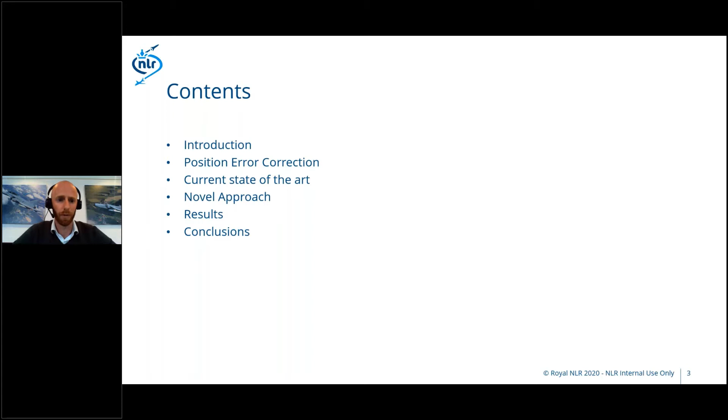Yeah, no worries, thank you. Thanks for the introduction. This is the usual slide we have at the beginning of our presentation at NLR, just for safety purposes. First, the contents of my presentation: I will start with a short introduction, then move on to explain what the position error correction is - I think that's something most of us know, but just to refresh our memories. Then the current state of the art, what approaches and methodologies are currently used to determine the position error correction. Then I will introduce the novel approach we developed, show you some results, and end with some conclusions.

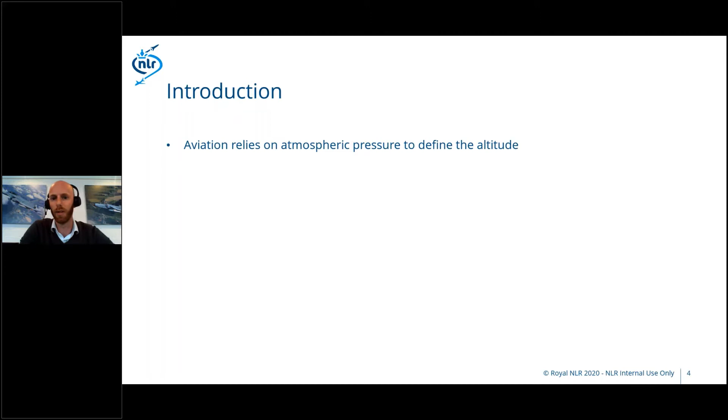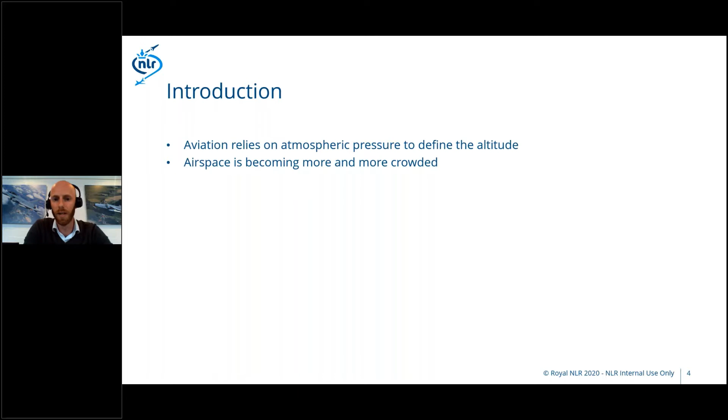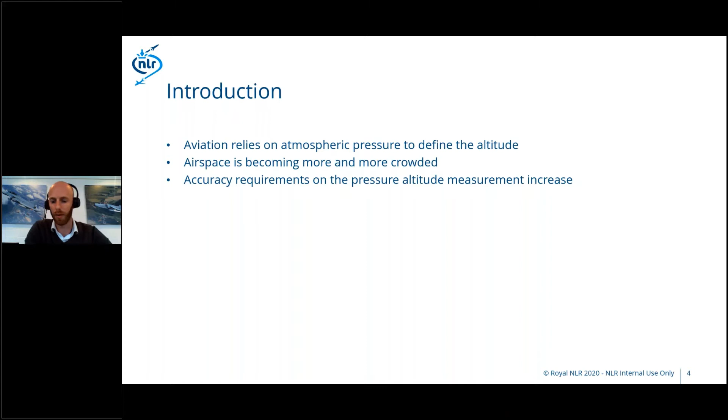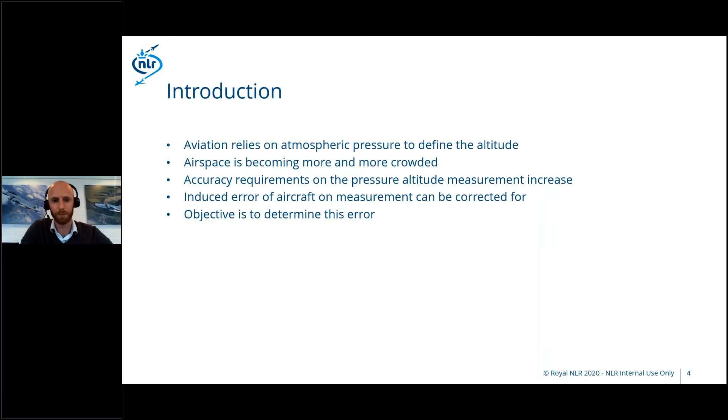So first, the introduction. Nowadays, aviation still relies on pressure measurements to define the altitude. Each aircraft measures the static pressure, and with that we define an altitude. But we also know the airspace is becoming more and more crowded - there are more people flying, more flights, and that means the accuracy requirements on pressure altitudes are increasing. Recently they have increased in a certain airspace, which we call the RVSM airspace - the requirements become more strict on that measurement. The problem is that the aircraft itself induces an error on your measurements, and that error can be corrected for. So the objective is to determine this error for your aircraft so you can correct it. For our research, we decided to use our own research aircraft, which is a Cessna Citation II.

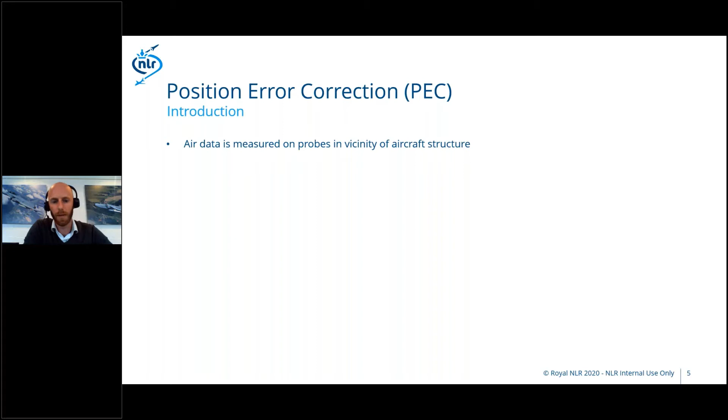So, the position error correction. We know that air data is measured on probes always on the aircraft structure or in the vicinity of the aircraft structure. We also know that at subsonic speeds, the flow field created around the aircraft extends in all directions, and for a considerable amount - usually about 1 to 2 times the span of the aircraft, so it's a large amount.

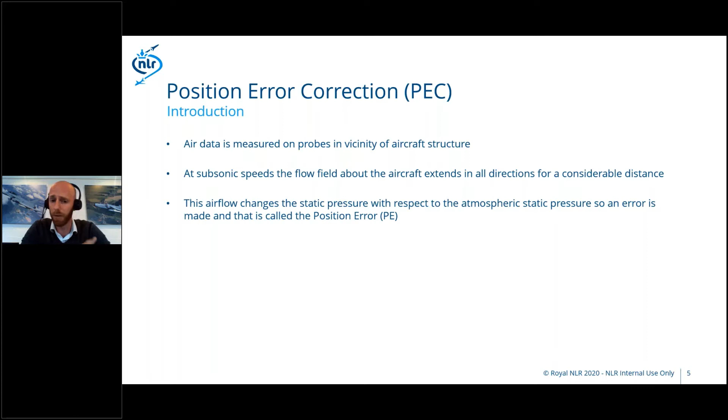This airflow, this flow field, changes the static pressure around the aircraft. That means that if you make a measurement in that flow field with your aircraft, you make an error, and we call that the position error, because it's sensitive to the position of where you put it.

We also know that the flow field is unique for each aircraft, each aircraft configuration, and also the flight condition. If you look at the top right of this slide, you see a side view of a typical aircraft, and below that the pressure distribution, the difference between atmospheric static pressure and local static pressure, which changes along a line drawn on the side of the aircraft. There are certain points, indicated here by 1 to 6, where the error is almost or exactly 0. However, if you change the aircraft configuration or flight condition, this curve will change, meaning it's impossible to find a location where the position error is 0 for all flight conditions.

Therefore, we must correct this error to make the measurement more accurate, and that's what we call the position error correction.

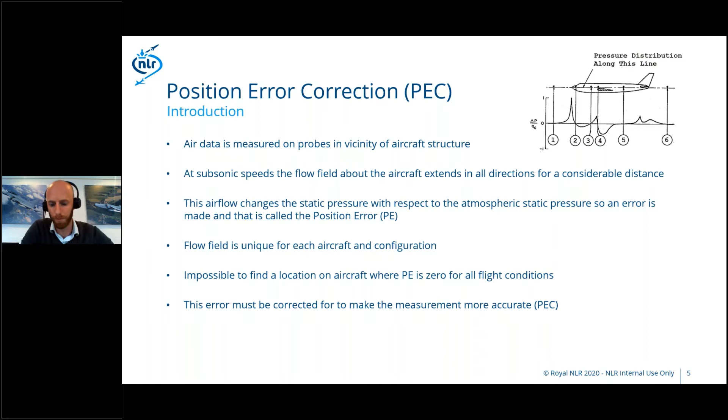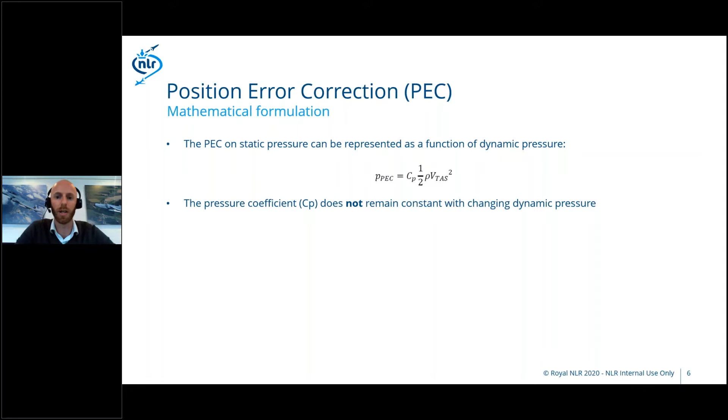So we decided to have a mathematical formulation for the position error correction in static pressure, representing it as a function of the dynamic pressure—1/2 times the density times the true airspeed squared—with a pressure coefficient in front. We also observed that this pressure coefficient does not remain constant with changing dynamic pressure: a change in altitude changes the density, or a change in speed, which also changes this pressure coefficient. That means the pressure coefficient must be represented as a separate function as well.

We decided on a polynomial expansion as a function of the inherent flight characteristics. The example here includes the Mach number, the angle of attack, the side slip angle, and a Reynolds number term. You can add as many high order terms as you like—the more high order terms, the more accurate the polynomial function becomes—but usually a few orders is sufficient for the accuracy we want.

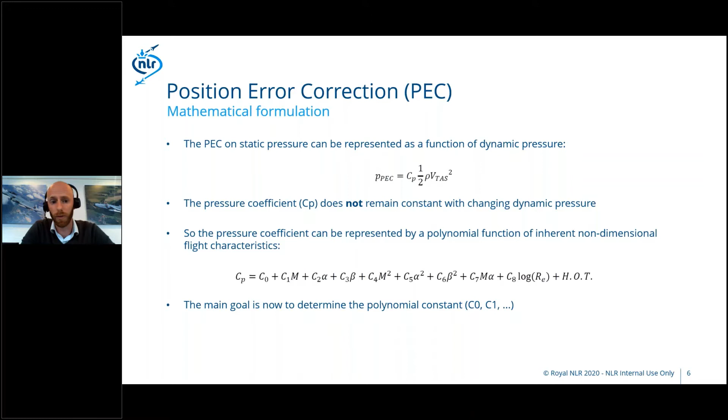Now the main goal is to determine these constants in the polynomial, C0, C1, etc., to determine the position error correction function. Currently, that is mostly done by means of flight tests. Now I will show you some currently used methods for flight testing.

One of the most popular is the tower flyby. Here, the aircraft flies by a ground station or a tower, and on the ground or tower, the static pressure of the atmosphere is measured. As long as there is not much wind, the measurement is very accurate on the ground. The aircraft then flies by the tower or ground station and measures its own static pressure, with the error included. Any small differences in altitude between the tower and the aircraft can be measured and corrected for, so the difference between both measurements becomes the PEC.

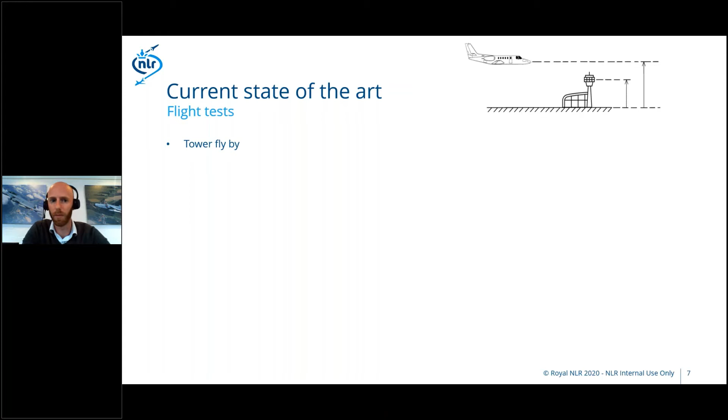Two more widely used methods are the trailing cone and the static bomb. Here you have a measurement device which you extend behind or below the aircraft far enough so the reference pressure is no longer influenced by the aircraft. The advantage is that you can reach multiple speeds and also high altitudes. The disadvantage is that you have a large structural modification to the aircraft, because you have to mount the system on it.

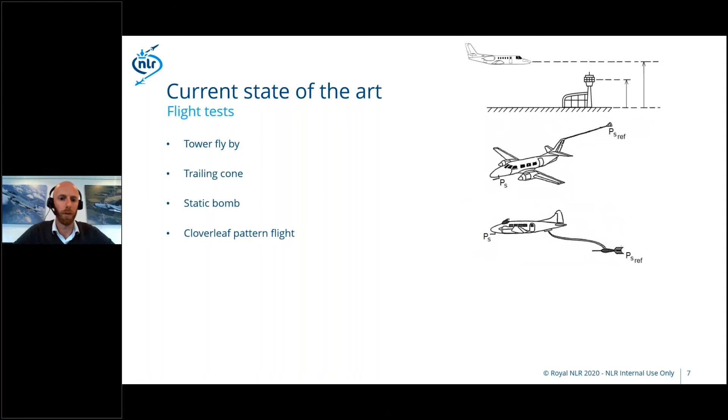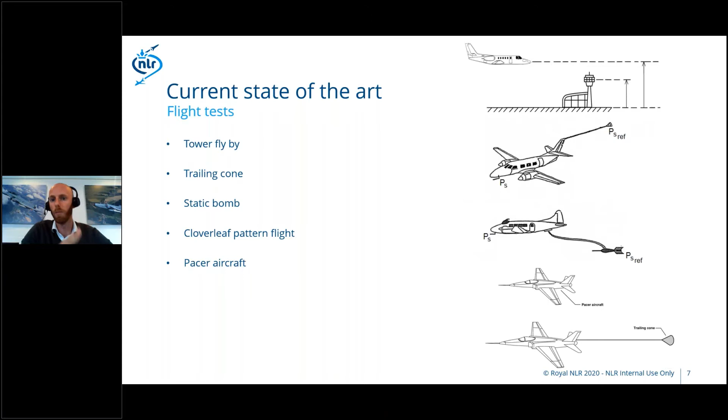There are also certain maneuvers that can be flown, like for instance a cloverleaf pattern flight. And of course you can use a pacer aircraft, one of the two aircraft already having to be calibrated or have a calibration device on it. There are of course more methods and more combined methods, but these are just a few that I wanted to present.

Our methodology consists of 3 parts. We start with calculations, so computational fluid dynamics. Of course, this is a very cheap method. It's not flight testing, but it's cheap.

We make a priori model with the computational fluid dynamics, so we make the first estimation of the polynomial that I showed earlier.

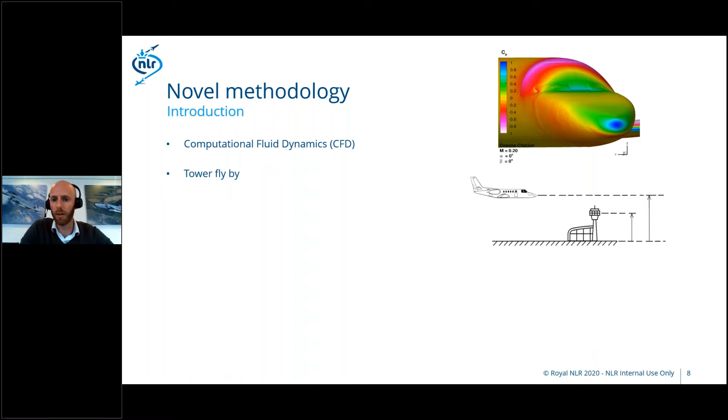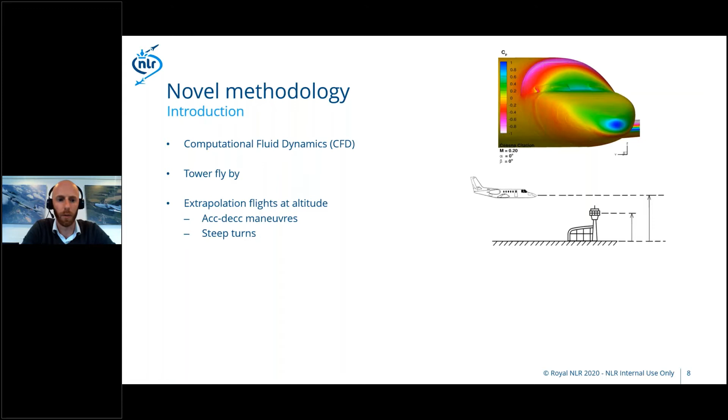We then use the conventional tower flyby method to validate and tune that model. And we end, and that's actually the novel part of our approach, with extrapolation flights at altitude. We have two different maneuvers that are complementary to each other: accelerated/decelerated maneuvers, and steep turns. I will come back to that later.

So first, our instrumentation. We have two locations on the aircraft at which we measure the static pressure. We have the holes on the fuselage that are already there on the Cessna Citation.

And then we have an additional nose boom that is mounted on the Citation with one single orifice also on the nose boom. And on the nose boom, we also measure the angle of attack and the side slip angle with vanes for more accuracy.

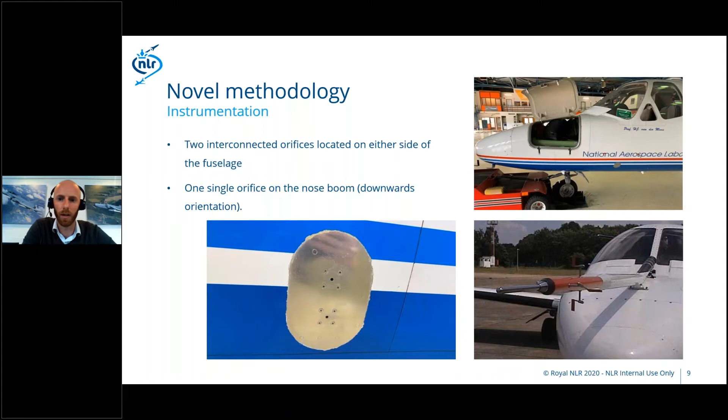So the novel methodology first has a priori model that we obtained from the computational fluid dynamics, and we check that against a hard reference using the tower flyby. And if needed, the parameters that we determined with the model will be validated or tuned using that hard reference as data.

But then we only have the data on the ground, and we also want the data in the air at high altitudes. And there we use what we call a delta mode, where we measure everything in delta, so in differences. We take differences between measurements, and if the static pressure of the atmosphere remains the same during a flight maneuver, then the difference in your measurement becomes the difference in the PEC, the position error correction. And that way we determine the PEC at altitude.

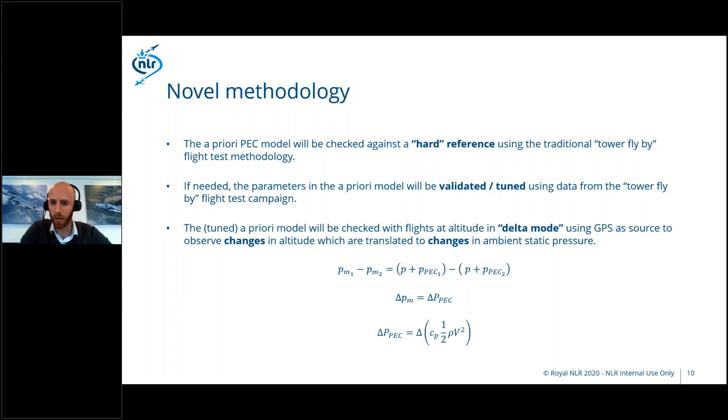Of course, the main thing for this method that must apply is that the static pressure of the atmosphere remains the same during that maneuver. I will come back to that later as well.

Like I mentioned previously, we want the static pressure of the atmosphere to remain the same during one of these maneuvers, so during, for instance, an acceleration-deceleration maneuver. And for that, we use weather models at altitudes.

So if you look at this picture, you see a weather model at a certain altitude above the Netherlands on a certain day. This was quite a convenient day because the isohypsal lines that you see on this graph are straight and parallel to each other, and that's what we want because we want to fly exactly on these lines.

An isohypsal line is a line that looks a bit like an isobar line, but it's a little different because it's also a line of constant altitude. So actually it's a line of constant pressure and constant altitude. It means if you follow these lines, your static pressure of the atmosphere will remain the same.

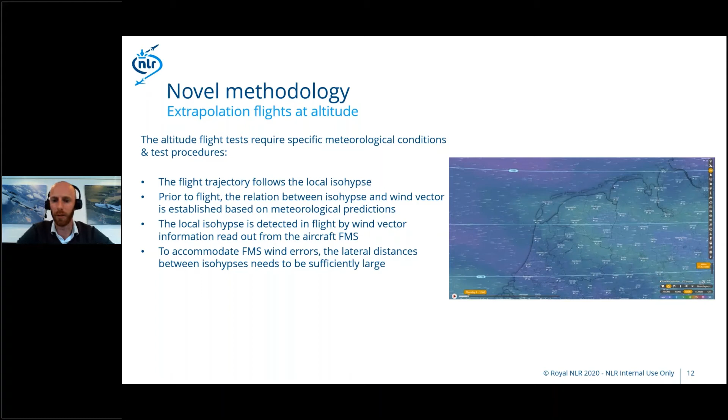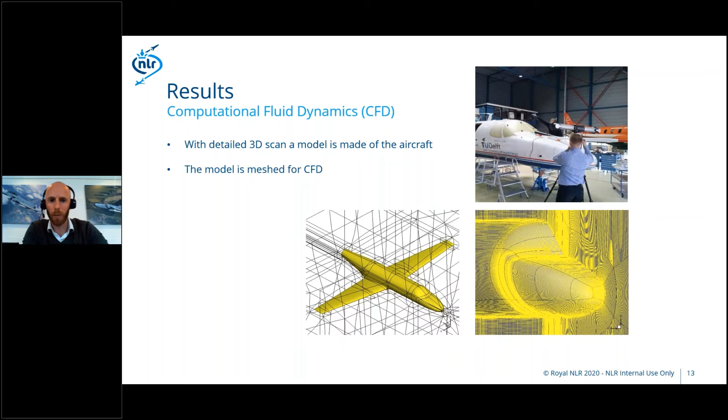So moving on to some of the results. We started with the computational fluid dynamics. We made a very high detailed 3D scan of the front part of the aircraft, where the accuracy is most required. And we meshed for CFD calculations, and then you get the nice colorful pictures.

This is just one side view of the nose of the aircraft. What you can see here is the location in front of the aircraft in blue, where the static pressure measurement on the boom is mounted. And on the aircraft itself, you see in the orange-yellow part, the measurement orifice of the fuselage.

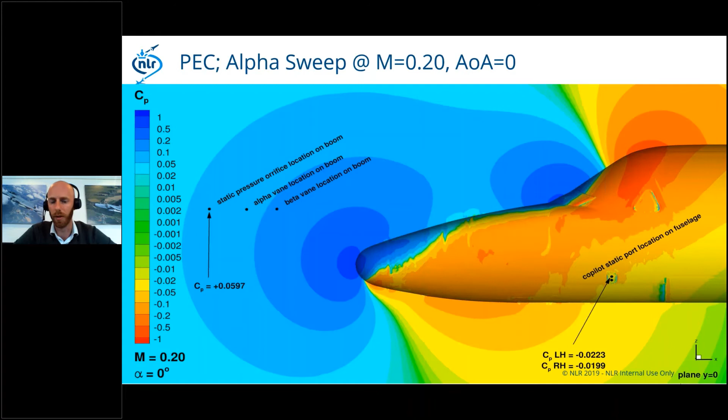The thing that we observed first is that in front of the aircraft we have a higher pressure, and on the fuselage of the aircraft we have suction, so a lower pressure. So the magnitude of the PEC is actually of opposite sign compared to the two sources.

So after CFD, we did the ground station flybys. The ground station consists of a GPS system. We measured the GPS location of the ground station and also on the aircraft. We use the GPS to correct for the altitude difference between our ground station and the aircraft as it flies by.

So the tower flybys were conducted, it was two years ago on Eelde Airport in the north of the Netherlands. We had very good weather, as you can see from the images. It was in the evening, so it's very good weather for tower flybys. We did two separate flights. One was at a lower mass than the other one, and that was basically to decouple the correlation between the Mach number and angle of attack.

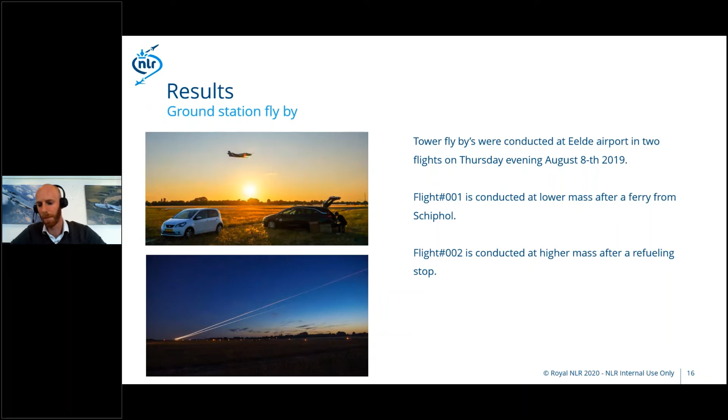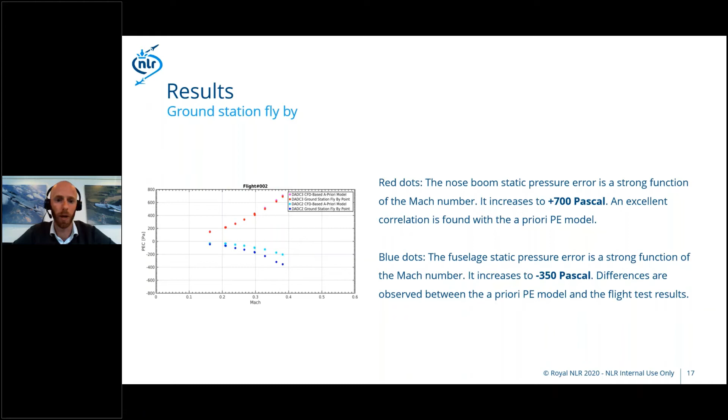But also, if you look at the cyan dots close to the fuselage line, those are actually the a priori model, the CFD predicted PEC on the fuselage. And you observe a large difference here. So tuning of the PEC formula was required against this hard reference.

Then we turn around and we use the same track to do an acceleration deceleration run. Again, we turn around in the opposite direction and do another acceleration deceleration run for redundancy. And then again, we turn around and use the same track for another steady control run to also observe the changes in the atmosphere over time.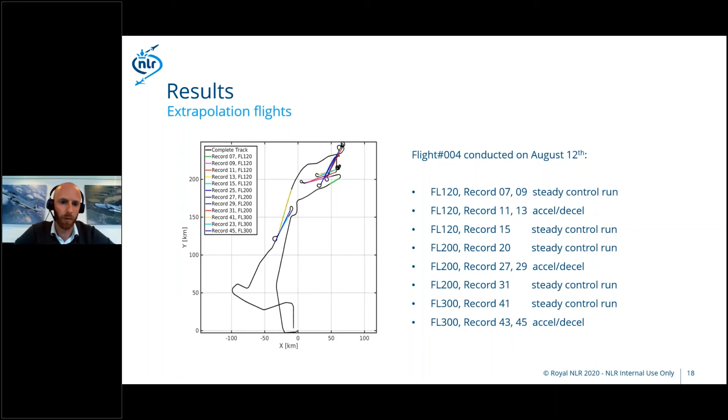So looking at some of the graphs that we got from one of these acceleration deceleration runs, if you look at the Mach number graph, you see an acceleration and deceleration. And then next to the Mach number graph on the left side, there's a GPS altitude. So we also observed that the GPS altitude does not remain constant during these acceleration deceleration runs.

And that's mainly because our autopilot is not capable during an acceleration or deceleration to really keep that GPS altitude exactly the same. So there's a slight variance, but of course not a problem because we measure GPS very accurately, so we can correct for it.

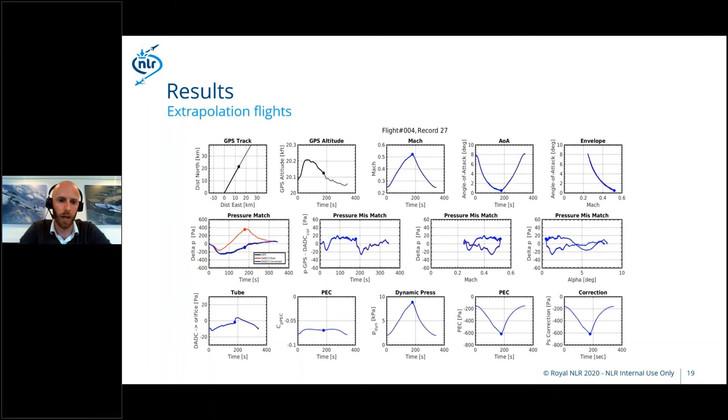Another graph that is interesting to look at is the pressure match on the left side. The red line there is the raw pressure difference from the boom mounted hull. And once that is corrected for the PEC, it matches the pressure that the GPS altitude would indicate.

So the conclusions. We determined the PEC of the citation within an accuracy of 35 pascals in the entire flight envelope with 3 sigma. So yeah, that's not only at high altitude, but also on the ground. The achieved accuracy was actually validated twice, two years ago, by means of tower flybys here at Manching Airport.

We also observed that the influence of the atmospheric conditions was more than expected, and we saw that especially in our scans of the atmosphere. The weather prediction models are, of course, models. They are very coarse, with a grid of 2 by 2 kilometers. And we observed that there are slight differences between what's predicted by the models and what's really happening in the atmosphere.

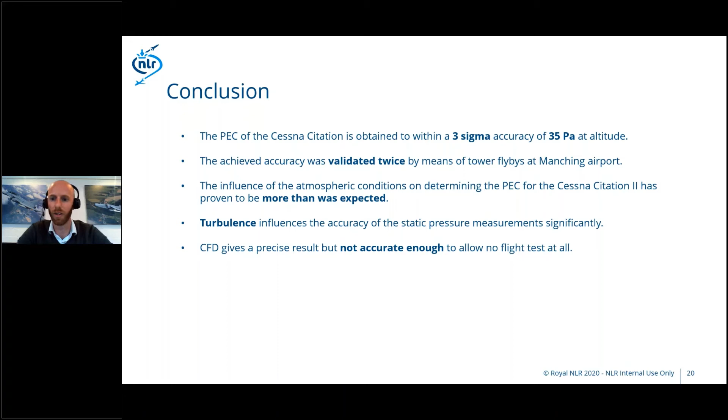And of course, turbulence influences the accuracy of your measurement as well, so we need to stay away from the jet stream, especially the boundary of the jet stream. Also what we observe is that CFD gives a very precise result, but not accurate enough to allow no flight testing at all. So that's positive news for us flight test engineers, because we are not yet out of a job.

Are there any questions?

Phew! I was worried that I was about to have to resign.

Thomas, thank you for your presentation. I have to say, it never ceases to amaze me. I think I've been going to Society of Flight Test Engineers symposiums for over 10 years now, and I don't think I've ever been to a single one where there hasn't been at least one presentation or discussion about the subject of position error corrections or anemometric calibration. And it's such a fundamental part of our flight testing activity, yet we see there are still new things to learn and new ideas coming along all the time. So that's really good to see.

Some questions have been coming in on the chat from Lisandre, who asked us yesterday. Actually, some of the answers are already there, but perhaps you could expand a little bit. Her first question was about the accuracy of the weather models, and you did touch on it in your conclusion. You mentioned the coarseness of the grid, which is obviously one of the parameters. But I'm also interested, even if you had a particularly fine grid, how could you be confident about those predictions, and is the error on those predictions bigger than the PEC you're trying to measure?

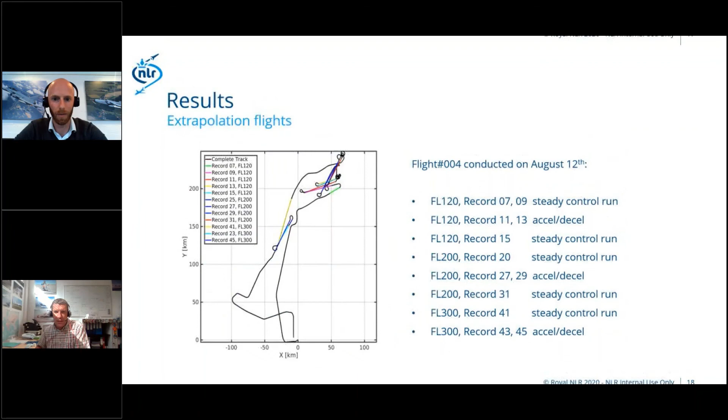Kalyan is asking - you mentioned an expression for the CP as a function of several parameters. He thinks it's on slide 6, so I don't know whether you can throw that up for us. And he had a question as to which was the last term - what was the definition of it? Let's have a look when we come back to slide 6.

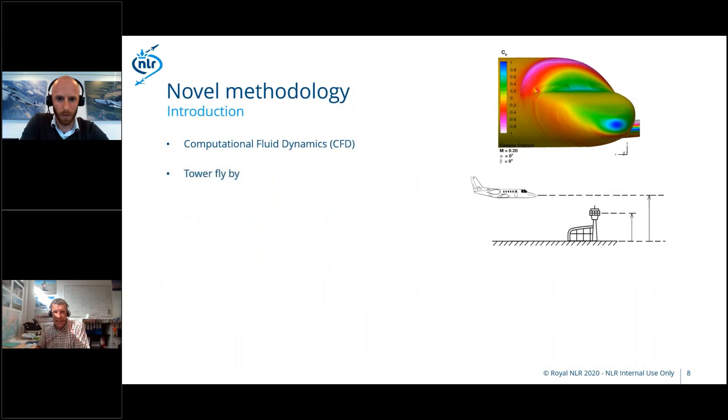Slide 6. Yeah, this one - you mean the HOT? HOT, yes, it's high order terms. It's an abbreviation for high order terms. So, like I said, you can add as many terms as higher order - to the 3rd power, to the 4th power, or go to infinity if you like. If you increase the order, you get more accuracy, but usually a few orders is sufficient for the accuracy that we want.

Okay, so it's a generic grouping term. Yeah, I think that answers Kalyan's question.

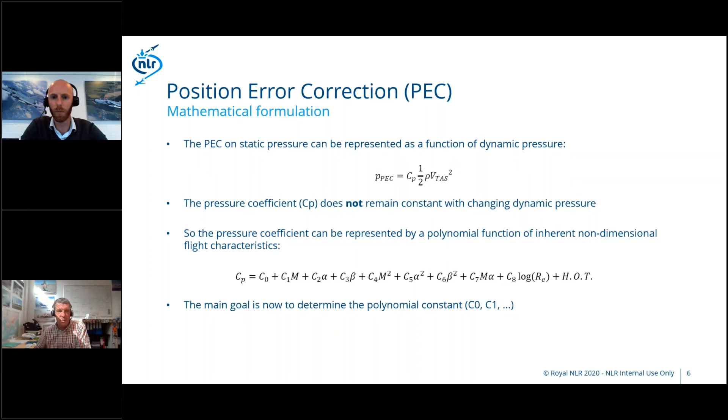We also had a question from Senthil, also in India. He's interested about the FTI which you were using on board the aeroplane. I don't know if you can say a few words about what you've got on board your citation. Yeah, actually I think I have a slide for that - no, I don't have it. But we have, of course, GPS on board, and we correct that afterward in post-processing, so that we have a very accurate GPS measurement, because we need to provide the altitude as well.

In the back of the aircraft, we have the IRS, Inertial Reference System, which we use to determine the angles of the aircraft. We also have 2 digital air data computers, one connected to the fuselage, and one connected to the air data boom. We have an air data boom in front of the aircraft, for which we measure the angle of attack, angle of side slip, and also an additional static pressure.

Thank you for that description. I seem to remember in a previous conference we might have had a paper about the instrumentation on your aircraft, because I know it's used for many different projects. So I guess you're always reusing the same instrumentation rather than starting from zero each time.

Yeah, exactly. Another question has come in from Jeremy. He's got a question about the weather models, and wonders whether you use them as an input for your method, or are they simply used to identify a suitable test zone. The second one, just for the test zone. We don't use them as an input. It's also not necessary. You just want to know at what location, what time, what altitude, and what heading we should fly.

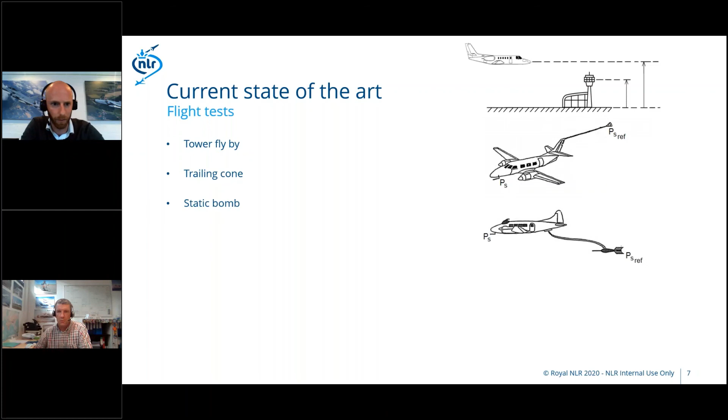What is also possible, if you look at these lines of the isohypsen at altitude, usually the wind direction moves parallel to these lines. So what we also did is look at our flight management system to see what the wind direction is, and provide some last corrections on the heading to really match the heading of the isohypse.

Okay, perfect. It sounds like you're taking data from every possible source to try and fine tune the results. Exactly. And still on the subject of weather, Kartik, who's also in India, wonders if any temperature inversions have an impact on your method, and how you have to deal with those.

Yeah, and especially at altitude, of course. But like I said, we also measure temperature on the ground for the flybys, and we have a very accurate total air temperature probe on the aircraft. So we also measure temperature.